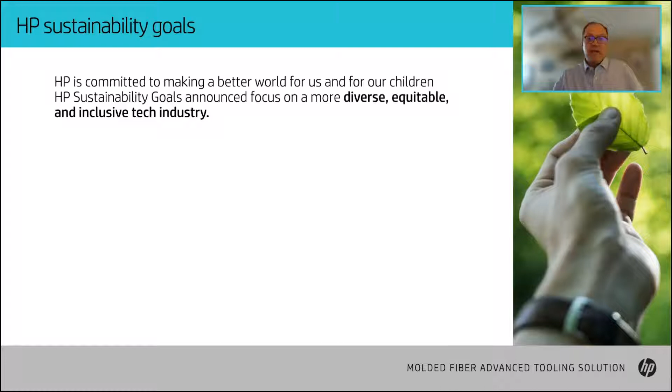Starting with HP's sustainability goals, we have a big focus on sustainability and our commitment to make life better for everyone, everywhere. Our recent broad goals around sustainable impact support that theme as well. As part of our overall sustainability focus, HP made commitments regarding packaging, specifically reducing the use of single-use plastics in packaging by 75% by 2025.

This goal was set last year in June of 2020, and we're making solid progress towards reaching that goal. We've also recently broadened our set of sustainability goals to include reaching 75% circularity for all of our products and packaging by 2030. This drives a focus on both products and packaging made from recycled, reused, or renewable content, and we measure that by weight.

We also know that many brands, many of you in the audience, are also focused on sustainability and transitioning your packaging solutions to more sustainable materials. For HP and many in the industry, moving away from plastics and to molded fiber or fiber-based packaging is one of the best ways to do the best for the planet and move away from plastics.

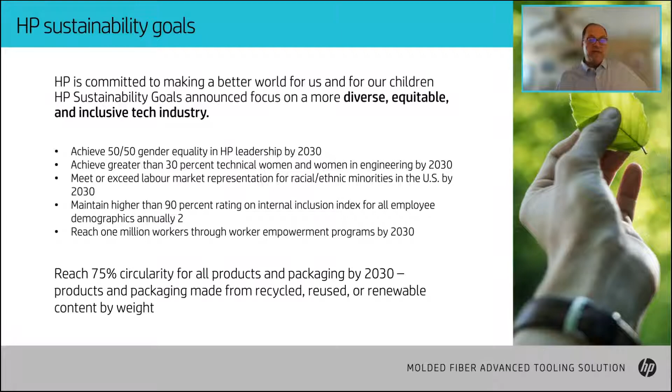This is our banner goal. We set this bold goal last year of eliminating 75% of our single-use plastics, and our baseline for reduction is the plastics that we used in 2018. We've started this journey and really focused on changing our designs and changing our approach to incorporate fiber-based packaging.

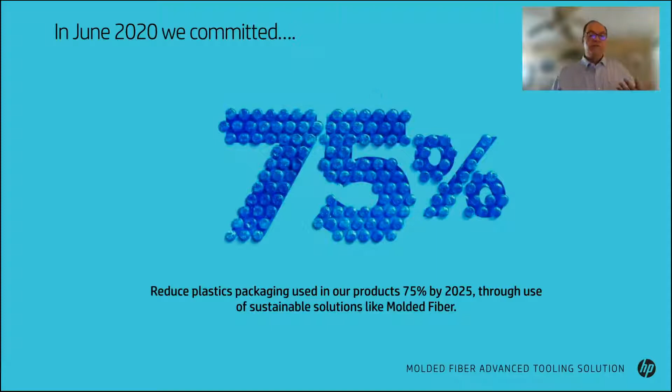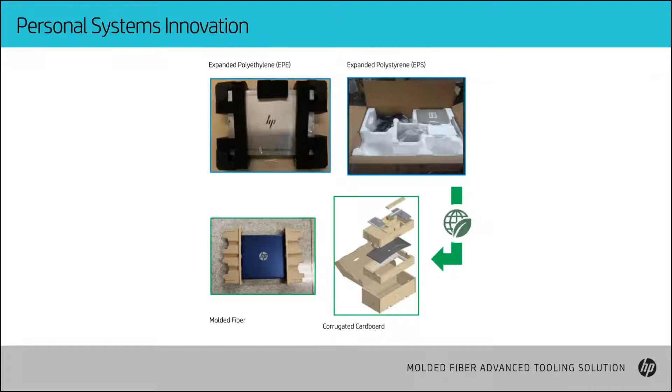An example is shown on this slide. For our personal systems team, here's the type of change that we're driving. We're aggressively shifting our notebooks, for instance, and desktops from expanded polyethylene or expanded polystyrene, shown in the top pictures on the right, to sustainable molded fiber. We're driving this type of change across the board, not just in our PC products, but in our printers, and wherever we have packaging, we're really focusing in on reducing plastics.

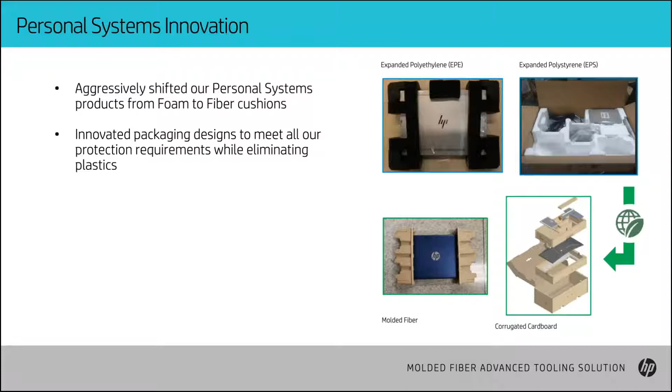We're also still meeting the aggressive protection requirements needed for the product while eliminating the plastics. We aren't stopping at just the cushions that protect the product, although that's most of the plastics that's been in our designs, but we're focusing on bags, films, any other in-box plastics, and shifting to more sustainable materials. Where plastics may still be needed, we're looking at more sustainable plastics, recycled content, bioplastics, or even alternatives made from paper, for instance.

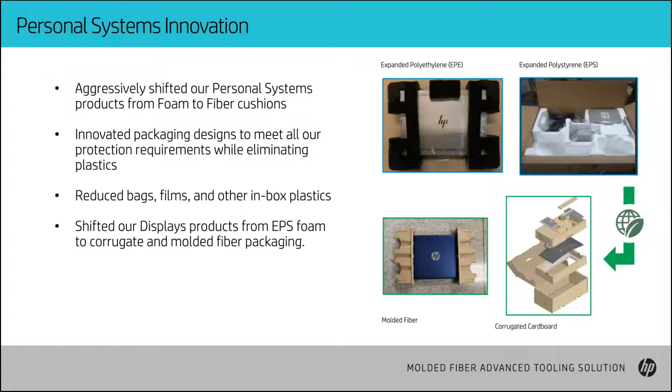So when we launched our goal last year, we also produced a video that describes this transition, and I'll play that video for you now.

That's a great video that summarizes both the problem we have with plastics in the world and the lack of recycling systems and recyclability of plastics, and the way that HP is using molded fiber to help solve the problem, at least for the products and the packaging we generate.

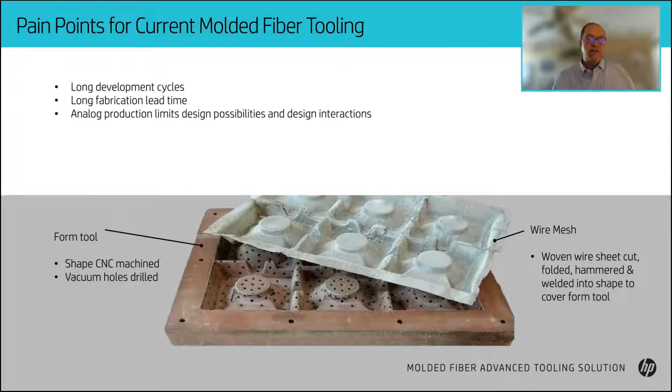Now, in HP's journey to use molded fiber, we've encountered some challenges and barriers, especially with the existing tooling technologies used in the industry. In general, they're difficult to convert our packaging because the tooling is a big barrier in terms of long lead times, development cycles, long fabrication times to make the tools themselves, and limitations of analog machining and wire mesh technologies is really at the heart of those barriers.

For our HP suppliers worldwide and molders, tooling maintenance is difficult and time consuming, it limits uptime, and involves specialized labor costs to address maintenance issues. Lastly, part quality in molded fiber can be inconsistent with traditional tooling.

The tools are based on CNC machining with drilled vacuum holes, as well as a woven wire mesh that you can see in the top picture. That's cut, hand folded, hammered, and welded in places. Sometimes certain shapes are really difficult to produce repeatably, and it has a lot of drawbacks.

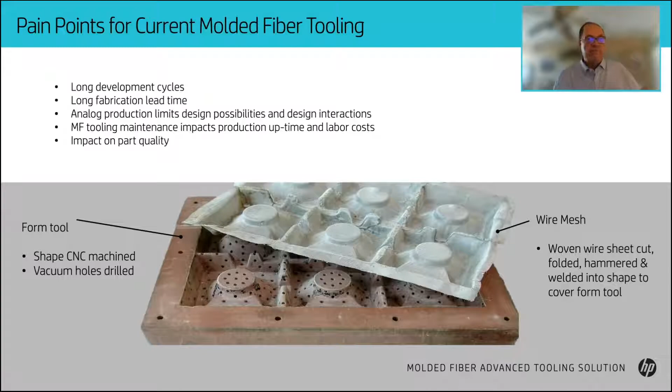So in that journey, we also have a 3D print business, and a few years ago we started to ask ourselves, could we apply our 3D print technology to the molded fiber industry, especially the tooling solution? Fast forward a year and a half or two, we actually developed a digital tooling solution based on HP's 3D printing platform, adapted to the needs of the molded fiber industry.

Our solution provides the ability to market products better, with faster time to market, consistent high quality, brand differentiation through the use of textures and customization of parts, and very competitive costs, bringing molded fiber to more brands and making it more affordable for them to move to sustainable packaging.

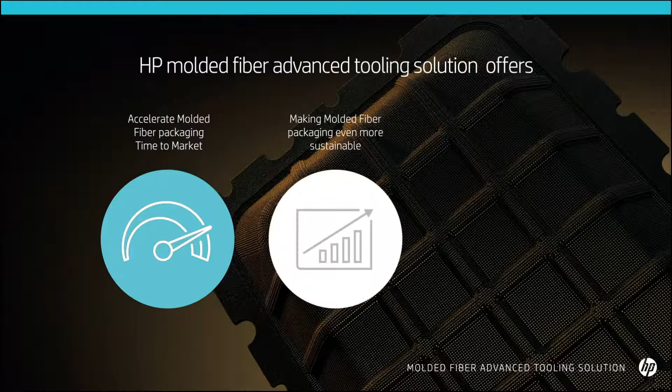HP's digital tooling design flow, combined with our multi-jet fusion 3D print technology, is really the key enabler to this tooling solution. The solution offers three clear benefits: first, it helps molded fiber manufacturers in terms of speed and time to market; second, it makes molded fiber packaging even more sustainable; and last, it enables brand differentiation through packaging designs. Let me go into detail on those three advantages.

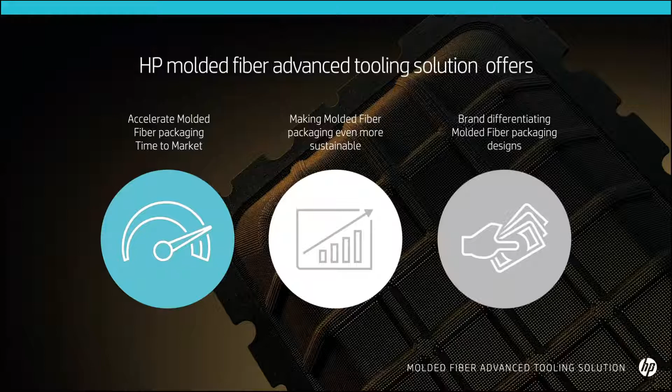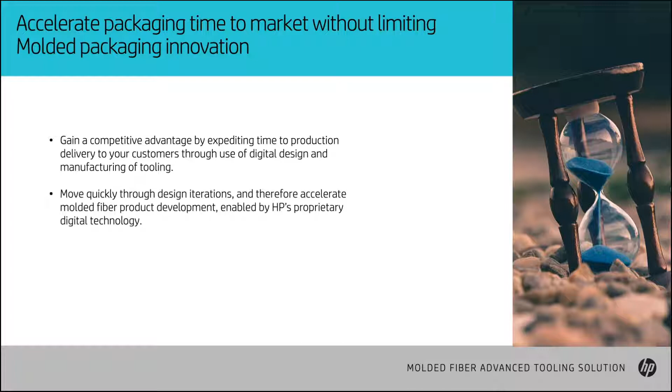In terms of time to market, we're all challenged with ever faster product development timelines. Our tooling solution helps expedite the design process, focusing on both part and tooling designs, accelerating molded fiber product development, all enabled by HP's digital technology and process flow. Looking at typical production tooling time, we can shorten time to mass production with production-ready tooling in as little as 2 weeks after finalizing your design.

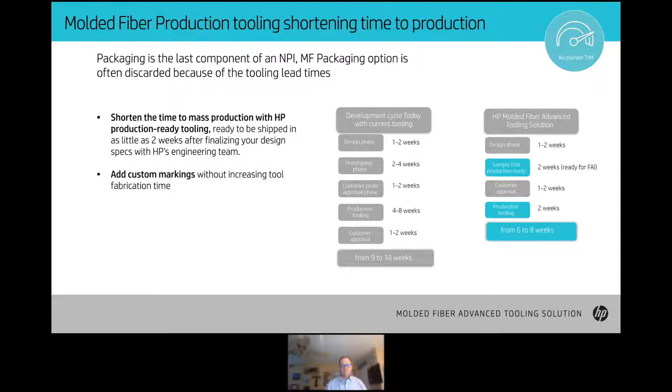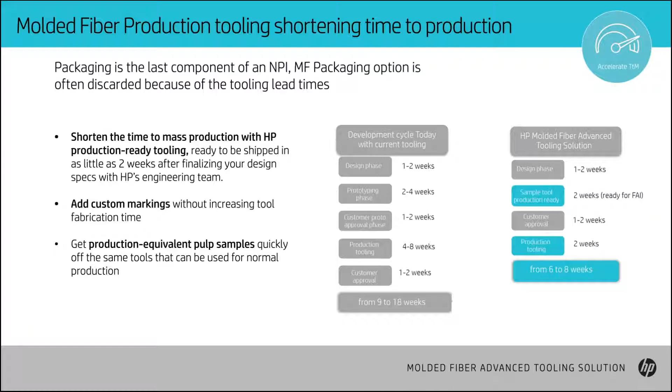We can add custom markings without adding fabrication time, and we can get production equivalent pulp samples quickly off the same tools used in normal production, because the process we use for any prototype tooling is also the same for production parts. This translates to between 3 and 10 weeks of time saved on a typical tooling development cycle.

In addition, from a quality perspective, we can achieve consistent, better quality parts with sharp, clean edges and borders and crisp, legible markings enabled by HP's smart screens. In addition to the fine edge quality, we can now combine superior legibility and definition plus rapid screen swapping to yield personalized packaging campaigns for your brand.

HP molded fiber advanced tooling makes part marking simple, including brand logos, recycle logos, text and part numbers, even textures that can be incorporated in the printed screen. Crisp edges make markings much more legible. Plain commodity parts can be transformed into higher value branded parts with the change of a screen.

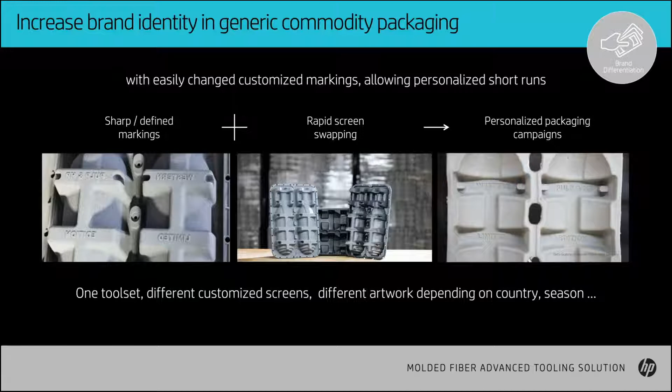HP Hot Swap Smart Screens make that change possible in as little as a minute while the tool remains in the machine. As an example, the image on the right shows how HP's tooling can help build a personalized packaging campaign. Western Pulp used our tooling to demonstrate how easy it is to change branding and marking of their packaging and sell direct to wineries potentially.

The combination of having screens that are easily changeable while the tool is still in the machine, and the ability to integrate features of fine detail into our HP smart screens, is key to opening up opportunities for brands to have customized features on commodity parts.

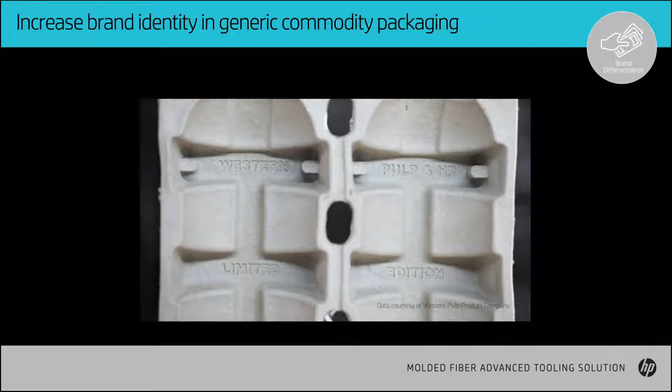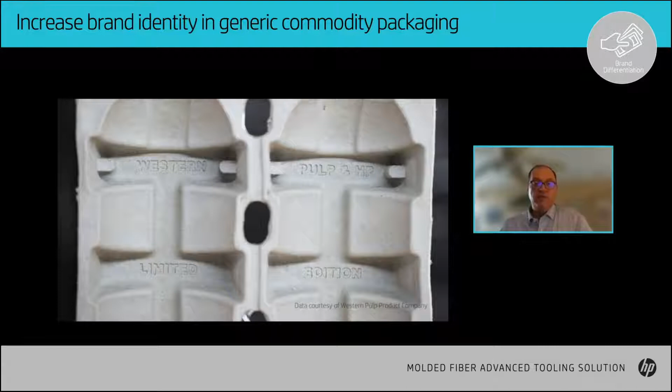This next slide shows another example of how our digital workflow and technology enables embossed logos, textures, model numbers, or traceability information. We can place that information on both horizontal surfaces as well as drafted surfaces. So anywhere on that part face, we can actually place these textures with our tooling technology.

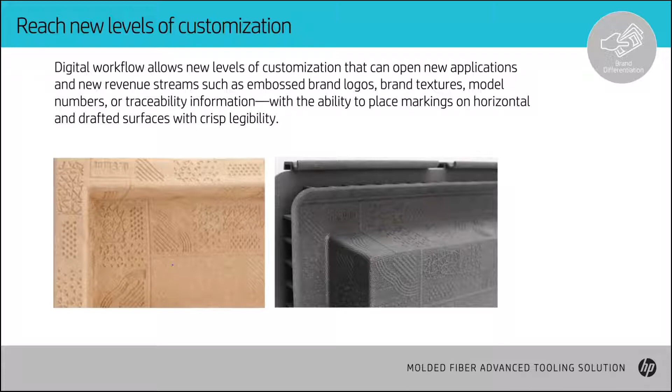Sustainable packaging does not have to be boring. The example shown here is our own HP Desktop Mini application, where we've enhanced the prior plain packaging with textures and branding inside and outside surfaces, so instead of those trays being boring, they carry the HP brand. They could carry your brand as well, with a little extra creativity, to carry your message, whether it's your brand, sustainability messaging, or whatever you'd like to place on those surfaces.

It's very easy with 3D print technology and HP's tooling solution. Here's another example. We've worked with Veritiv, and this shows the potential of customized molded fiber packaging, really only possible with our tooling solution. Veritiv is one of our foundational customers, showing the potential of branding with this particular tooling.

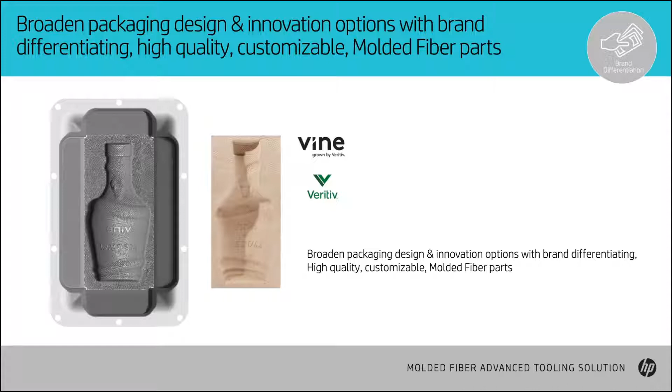You can see that the screen is on the left and it prints the part on the right, which shows a lot of fine detail. This one happens to be a wine bottle example on the right as well. So you can see there's a lot of really interesting things you can do, opening up the whole world of customization on our molded fiber parts.

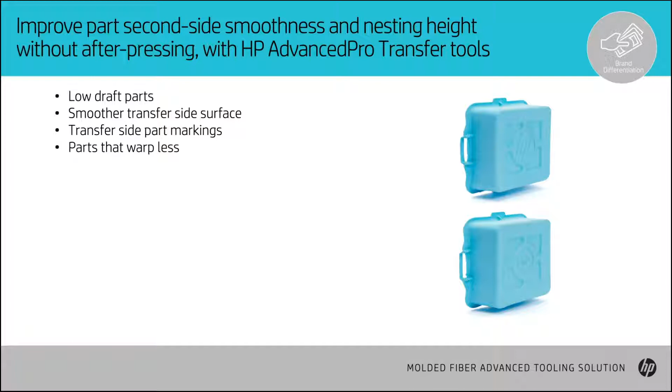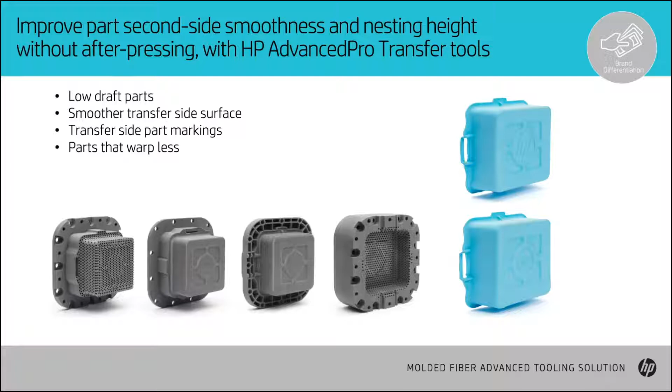In addition, HP has developed an AdvancedPro Transfer technology, which enables second side smoothness without after-pressing in many cases. A lot of times the problem with molded fiber is you have one side that's smooth and the other side is usually very coarse. With this technology, you can have a smoother side, both the transfer side as well as the tool side. You can have low draft parts, and you can make those parts with less warp afterward, perhaps without pressing as well. We're conducting pilots of this technology now that offers those benefits to customers.

One of the other key benefits of our solution is making molded fiber packaging even more sustainable. How do we do that? First, we've been able to optimize and reduce the fiber material consumed without decreasing performance. We do this through better first pass retention of fibers and more even wall thicknesses throughout the part, which we implement through the use of actual tool blockouts, so you don't use fiber in places where you don't need it.

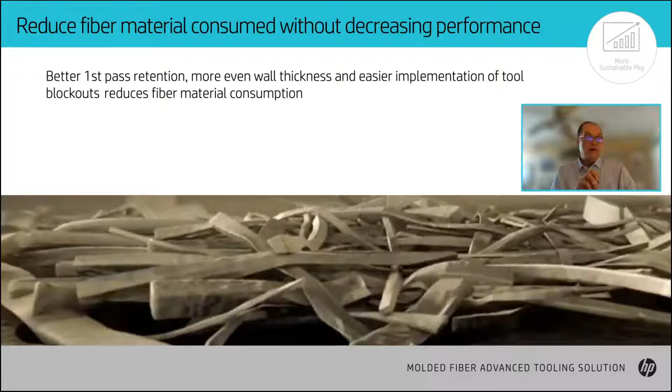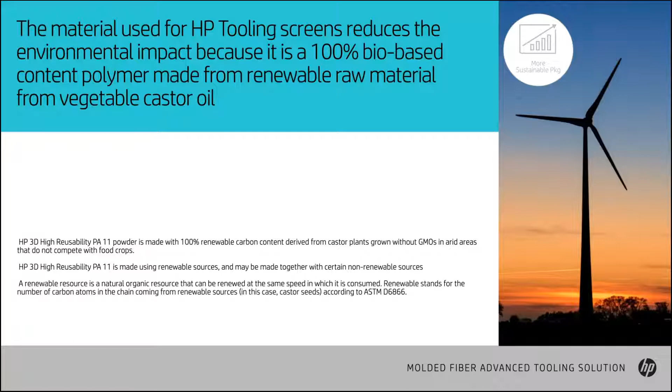We also have technology, which John will talk about, that allows you to direct the flow at a tiny level. The holes we use for perforations can be turned on or off, directing the flow of the slurry into the part. Also, the screens and resin we use in our tools are made from sustainable material - the raw material is actually made from vegetable castor oil. So we're even thinking about the materials we use in the tooling and trying to find sustainable solutions there.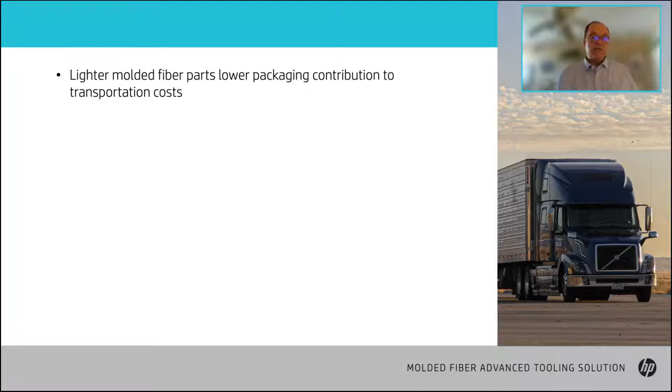Lastly, the parts produced from these enhancements result in lighter molded fiber parts, and the result of that is also lower energy to dry the parts. It's all contributing to a lower carbon footprint impact for both the tools and the production parts as they travel through the typical supply chain.

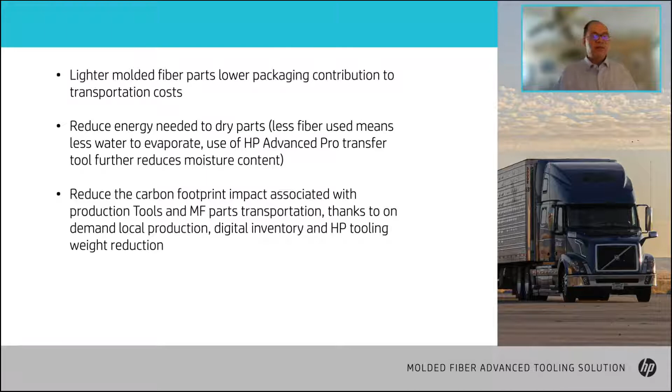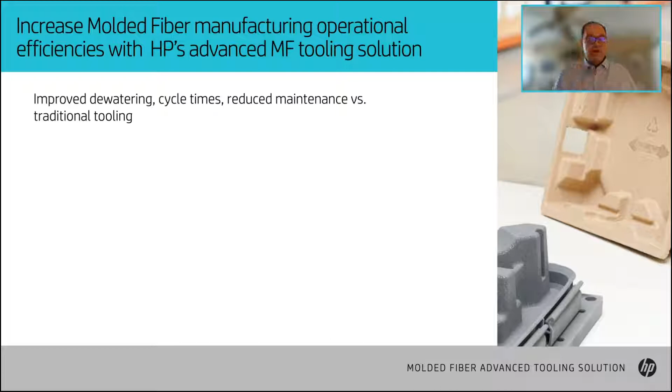One other benefit is around operational efficiency, and we've achieved improvements through improved dewatering times - that's the time it takes to dry the part from slurry into a finished part - shorter cycle times, and reduced maintenance as well. This all makes for more efficient molded fiber operations by molders, and should translate to lower costs for the end customer for the parts.

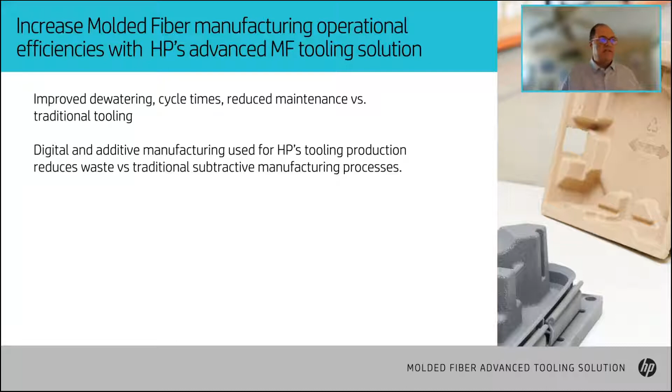We also reduce material waste through additive manufacturing in making our tools, versus traditional subtractive processes like CNC machining. All of those are subtractive, and the metal you're taking away in making those parts is really wasted.

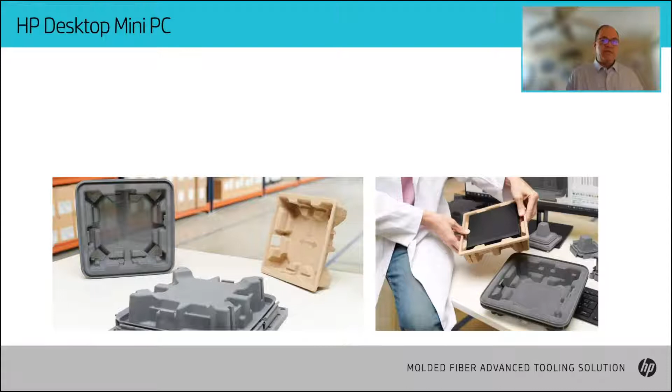Lastly, I want to show a proof point. This was actually the desktop mini I referred to earlier, but this was our first major HP product. The desktop mini was launched in February of 2020 on a very high volume PC distributed in North America. We partnered with our foundational customer Veritiv as well as Fiber Innovations and achieved improved quality, lead time, and actually cost improvements as well.

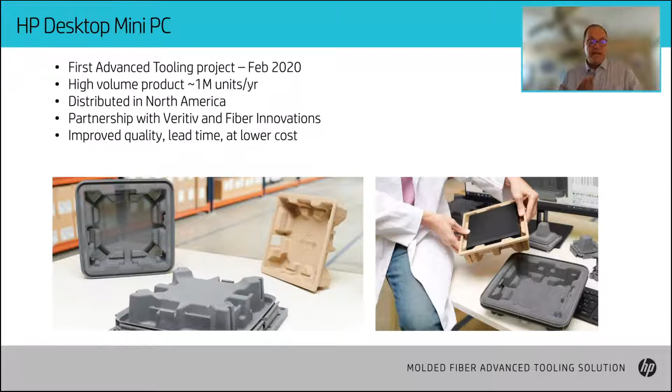That has led HP to evaluate every possible molded fiber design to see if it can be used successfully with our advanced tooling solution. Therefore, HP is helping reach its own sustainable packaging transformation, and we hope that by sharing this with other brands and the whole supply chain, it will help convert other brands and help them reach their sustainability goals as well.

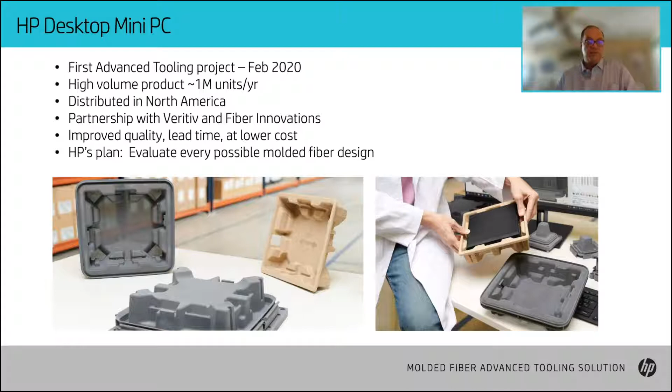Okay, so now I'm going to hand it off to John, who will share a bit more detail on how we achieve these results.

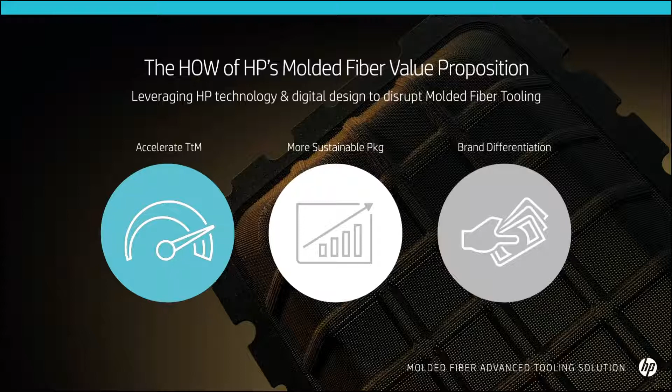John: So yeah, I'm John Bryden, and I am the solutions architect for HP's molded fiber solution. I'm going to talk about how we have applied digital manufacturing and design to bring new value to an industry that's not evolved much in decades. Many of the pain points that Eric highlighted earlier are associated with the manual nature of the manufacturing of molded fiber tooling.

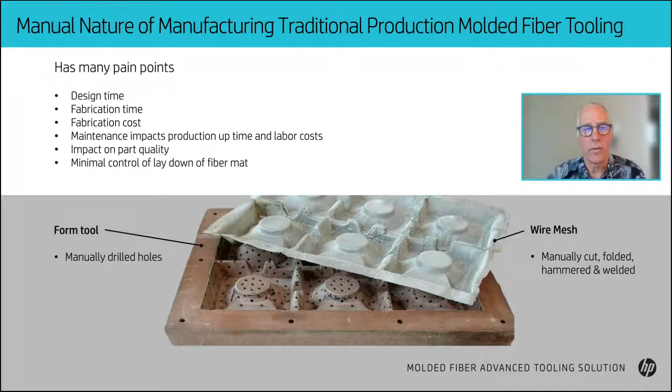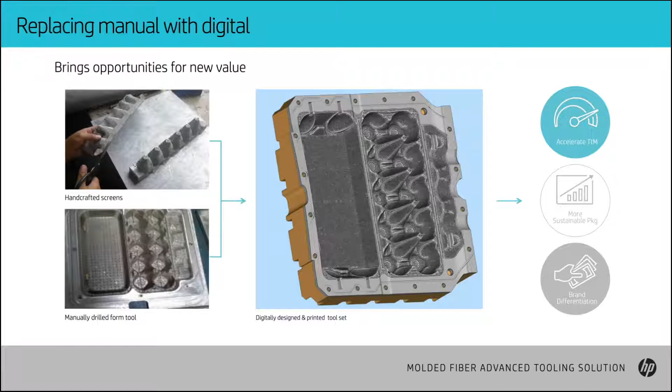So we are replacing the manual processes with digital design and manufacturing. And therefore, we're able to accelerate time to market, increase the sustainability of molded fiber packaging, and open up new opportunities for easy brand differentiation, as Eric was pointing out. Digitally designing tooling offers so much value that traditional tooling cannot, but it requires powerful and unconventional design tools to

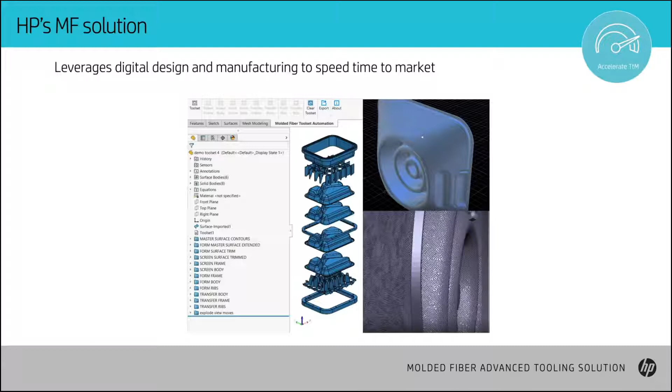deliver the fine detail necessary for the molded fiber process. We have leveraged traditional and novel CAD tools to accelerate the delivery of design files that only HP's 3D printing technology can deliver. We're fortunate to have technology that is able to produce the screens, which are the most important

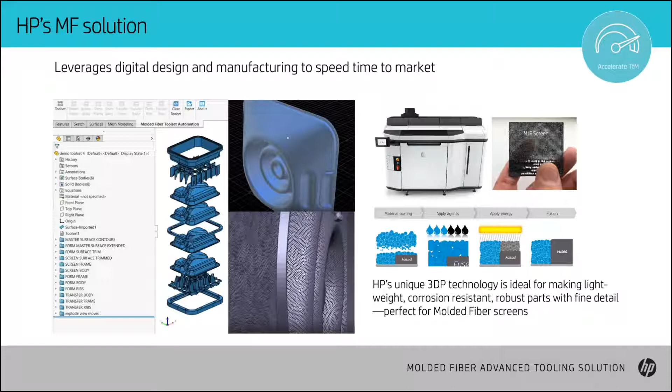part in making molded fiber products. We're helping to accelerate time to market by eliminating the need for a separate prototyping tooling stage. The traditional part approval process is a two-phase process whereby a prototype tool is used first to verify a part design. However, that prototype tool usually cannot deliver parts with the surface quality of a production tool.

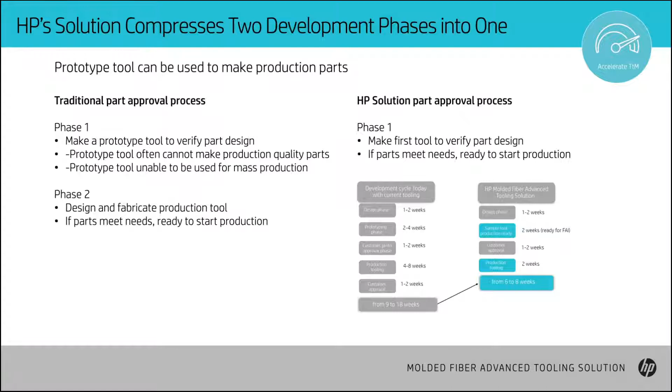And the prototype tool cannot be used for mass production because it's either too weak to support the forces in the process, or it gets clogged too quickly, so you can only produce a small number of parts. Whereas with HP's sample tool, it's ready to start ramping production as soon as parts off of it are approved. And additional copies of the tool can be delivered much more quickly than traditional tools so that you can get to full production capacity very efficiently and quickly.

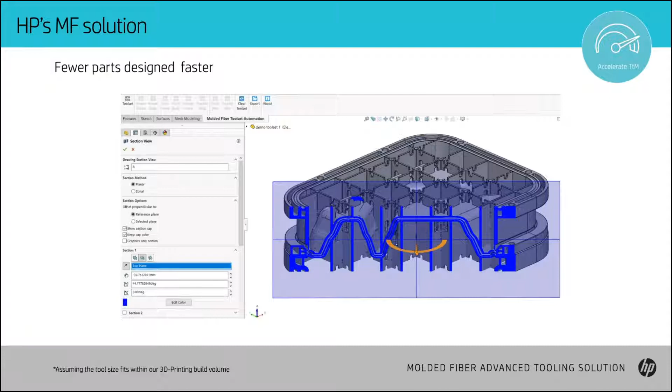Furthermore, with HP's tooling, there are fewer parts to design and deliver. Traditional tools have to be sectioned into several pieces in order to accommodate the complicated manufacturing process. Whereas with the HP tool design, it's much simpler. There's no splitting of the tool. Of course, there are limits to the size of our 3D printing capability, but if the tool fits inside our build volume, you have just a few pieces, and it only takes 1 or 2 days to produce the design.

And we've even been moving towards automating that entire process. So the time to get to a design is going to drop dramatically.

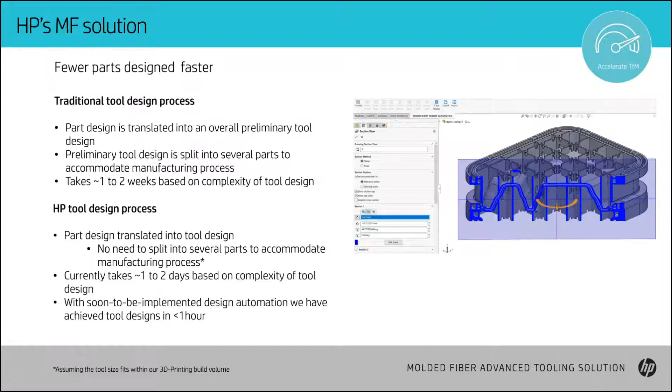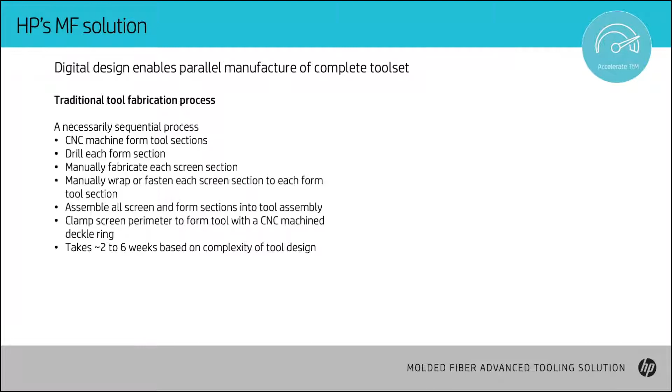Even the fabrication process is faster with HP's solution. As you can see, there are many sequential steps in the traditional tooling fabrication process. Whereas with HP's tooling, it's much more efficient because you can print all of the parts of the tool simultaneously. The screens don't have to wait for the form to be made, whereas in traditional tooling, you can't make the screen without a form. So that's a benefit in the fabrication process.

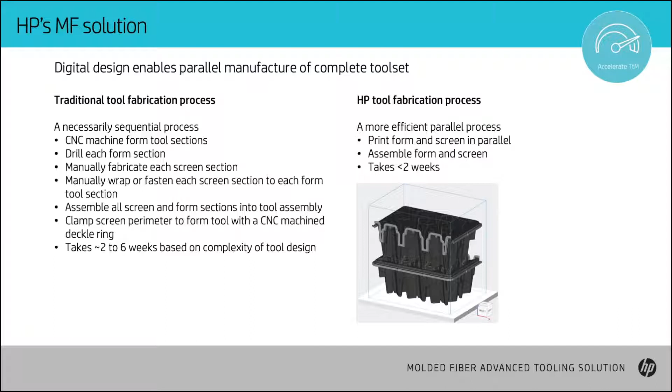And even in assembly, you've got fewer pieces to put together because we're able to integrate parts that are necessarily separate with a traditional tool design.

Because HP's smart screens are seamless and they integrate features that are critical to the manufacturing process, such as the deckle ring or hold downs and blockouts. Those are all technical things, but they are crucial for producing parts. Because they're integrated in HP's smart screens, the artifacts that they often create on the parts and result in poorer part quality are eliminated. So we're able to have the crisp edges and the very legible markings and the real sharply defined holes that Eric was referring to earlier.

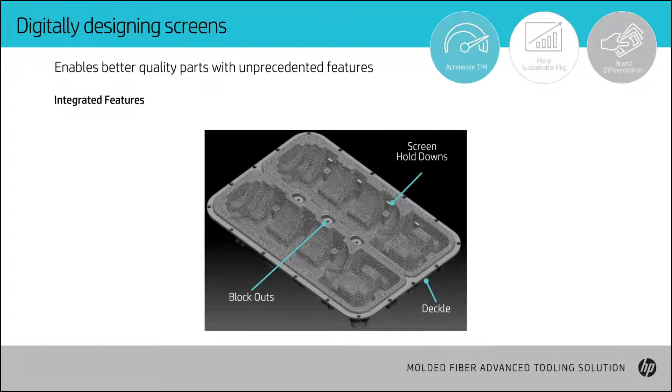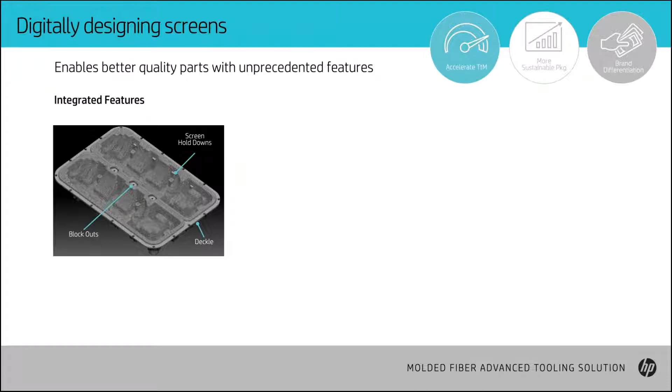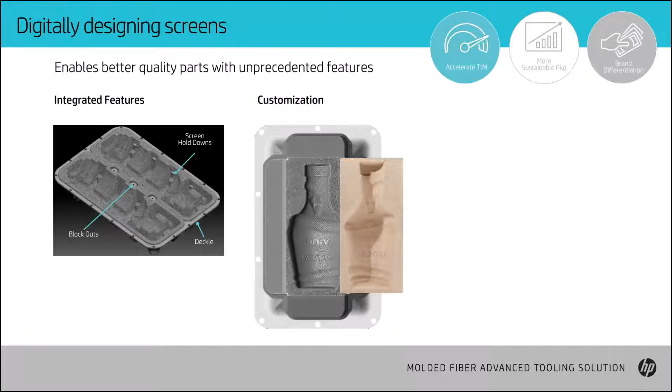And then in terms of efficiency, the digital design enables HP's tools to make better parts. And we'll talk more about that in a moment.

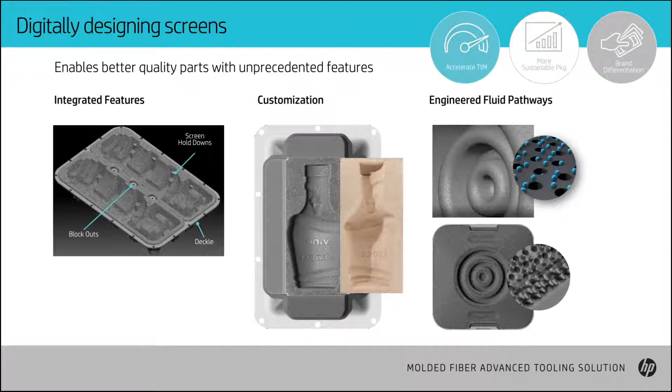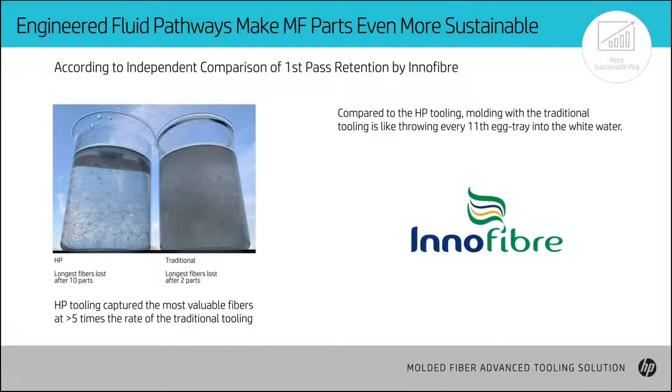So engineering of fluid pathways is the way we are helping make molded fiber packaging more sustainable. We worked with an independent researcher and testing company to test some of the HP value proposition. Their results proved that with HP's solution, we're able to do just that, make packaging more sustainable. They found that because of the way we engineered those pathways, we're able to make equivalently strong parts with less material, less water, in less time.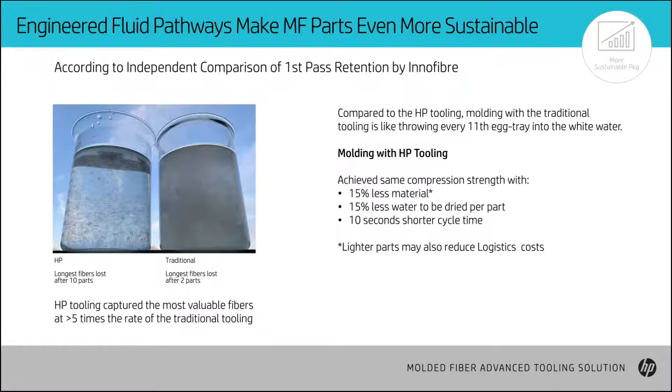And because you're using less water, you're also using less fuel to dry those wet parts, thereby making the part even more sustainable. And in addition, because we're able to make those parts as strong with less material, they're going to be lighter. And when you're shipping many products packaged in molded fiber, that molded fiber contributes to the weight that needs to be shipped, and therefore lighter parts can reduce the carbon footprint of the entire shipment. We're also making better parts with our engineered fluid pathways because many parts require additives.

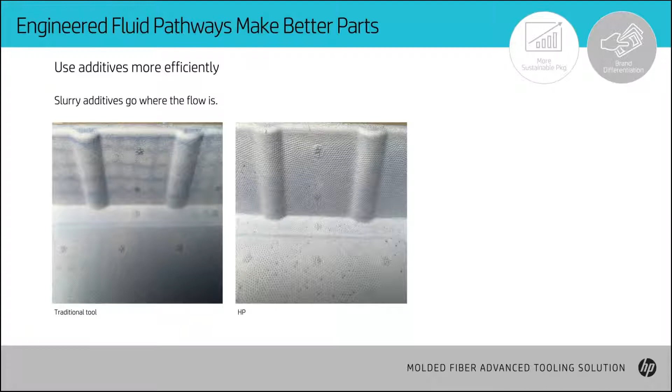The use of additives is dependent on the efficient flow of the slurry in the tools. So we are able to eliminate or reduce the amount of additives needed to create the properties that those additives are important to add to the slurry.

These two parts show the result of an additive, in this case a dye, being used in traditional tooling, where you can see there's a lot of dye and a little bit of dye because it's not dispersed evenly. So a lot of molded fiber manufacturers avoid making colored parts because it's hard to make a consistent colored part. However, if you use an HP tool where the fluid flows much more evenly across the tool, that additive is spread much more evenly throughout the tool.

But dye is just one type of additive. There are many products that need grease proofing or waterproofing, and those are additives in the slurry that need to be distributed evenly.

One customer reported to us that when they tested parts off of the HP tools, the performance in their grease-proof test was many times better than the performance of the parts they were getting off of their traditional tools. So performance is one way brands can differentiate, and through the efficient use of additives, HP's tooling helps drive better performance.

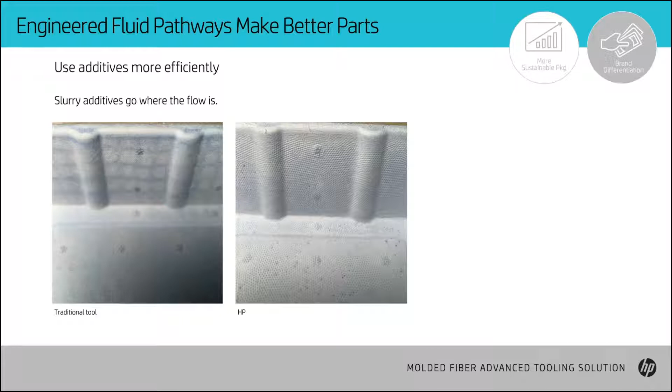The HP AdvancedPro Transfer tool that Eric mentioned before is another way that we're driving better performance and bringing branding opportunities. It's a digitally designed screen that is used in combination with the least valuable part of a traditional tool, which is the transfer screen.

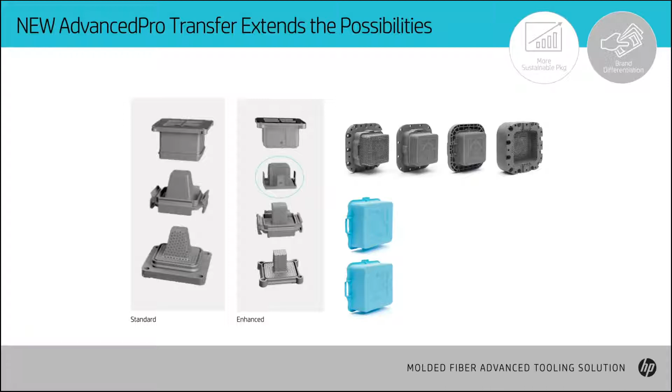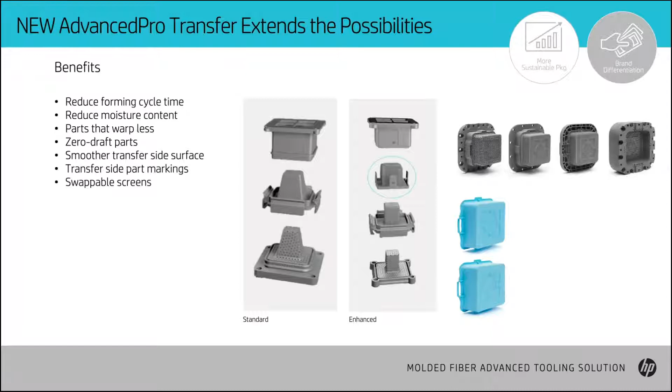And with that additional screen, we've transformed that part of the tooling into a value-added opportunity to deliver a smoother second side surface that can be used with low draft walls or even zero draft walls, and with markings. So you can now have a part that has a logo on one side and some other markings, whether it be environmental messaging, on the other.

And these are opportunities being opened up for lower cost packaging solutions, where you may not be able to afford the expense of thermoforming parts. So this is all brought about by the AdvancedPro Transfer, but it's doing more than that.

It's helping molded fiber parts become even more sustainable because we can remove additional water from the part from the second surface through the enhanced transfer, thereby reducing the fuel needed to dry the part and reducing the tendency to warp when drying. So higher yields, less fuel used, a more efficient process yields more sustainable molded fiber packaging.

And finally, we are taking this to another level by applying even more engineering capabilities that will allow us to further accelerate the delivery of production-optimized tooling and improve sustainability.

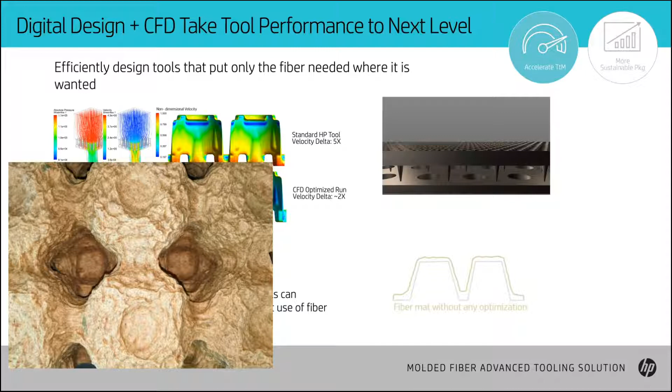Usually fiber is deposited more than is necessary for meeting specifications. I mentioned previously how we were able to prove that we could make a part as strong with fewer fibers. In the picture on the lower left, you can see what is a common situation with molded fiber parts: there's a lot of excess fiber going to areas of the tool where it's really not needed.

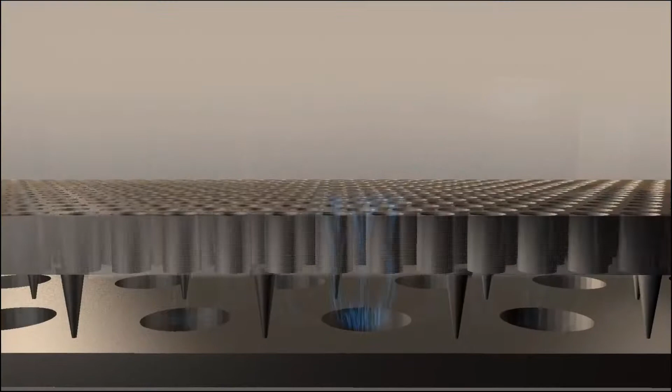But with digital design of screens, guided by computer-aided engineering of fluid dynamics, we're starting to design tools that will make molded fiber packaging even more sustainable. As you can see in the video, we have the ability to decide which pores in the screen should remain open or closed to provide the best quality molded parts.

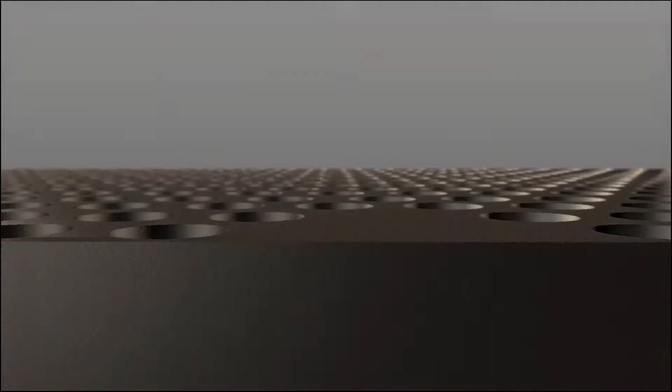You cannot do that with traditional woven wire screens. It's just not possible to close off individual pores.

And moreover, we'll be able to make tools that control the laydown of fiber to provide more fiber only where it's needed to meet the needs of packaging and offer differentiated designs.